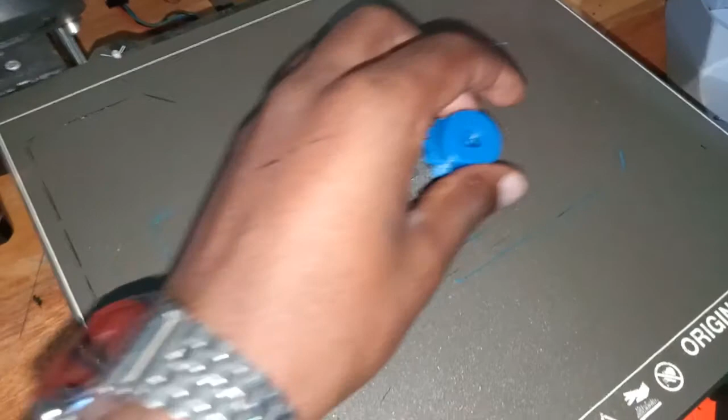In this section of the video, I'm going to show you the steps that I carried out, or the history of the design of this bevel gear. So I used Fusion 360 to design the gear, and the material for this gear is plastic PETG material. This lower section of the screen shows the history of the model gear, the 3D gear.

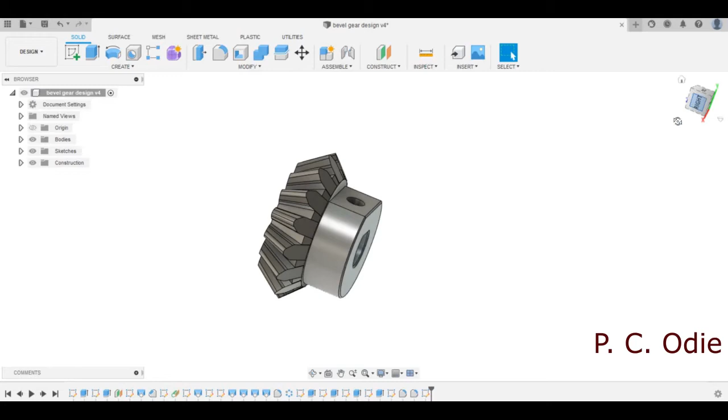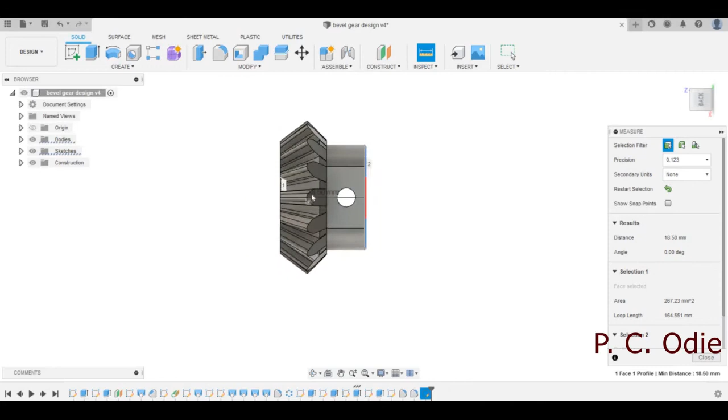So to begin, let's do the inspection. The length of the bore is around 18.5 millimeters. Here, that's 18.5. That's the length of the gear, and then the central hole, or the bore where the driven shaft is mounted, or where the central shaft passes through, has a diameter of around 8.1 millimeters.

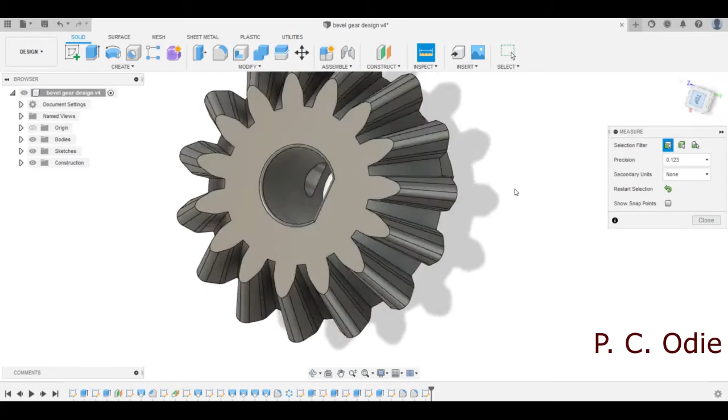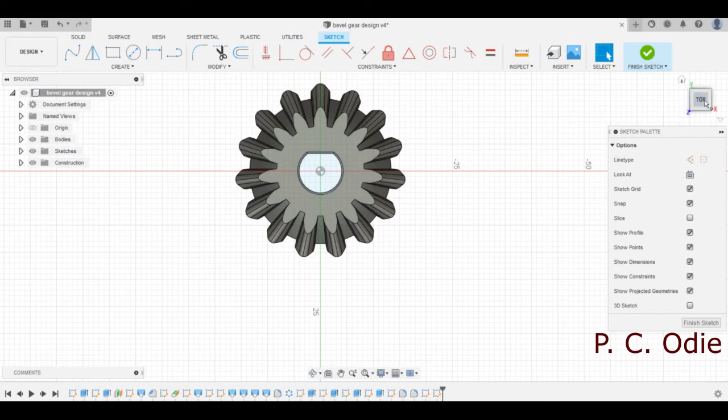And also for the outside diameter, let's see if we can find it. You can estimate. So the outside diameter of this bevel gear is around 32.2 millimeters, and then for the pitch diameter, you can try and estimate it here. So the pitch diameter is around 29 millimeters.

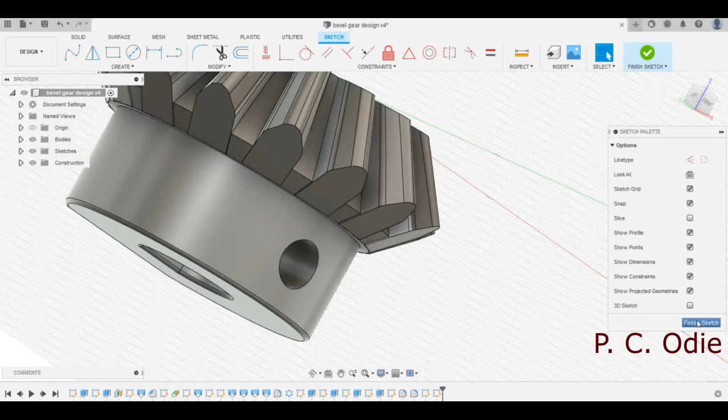That's the pitch diameter for this bevel here, and it also has a keyway. It's not entirely a keyhole, but it does the function of the keyhole. It's used to reinforce the central shaft, or the shaft that goes through the bore. Its diameter is around 4. So an M4 screw is strong enough to reinforce the central shaft, and it goes from end to end.

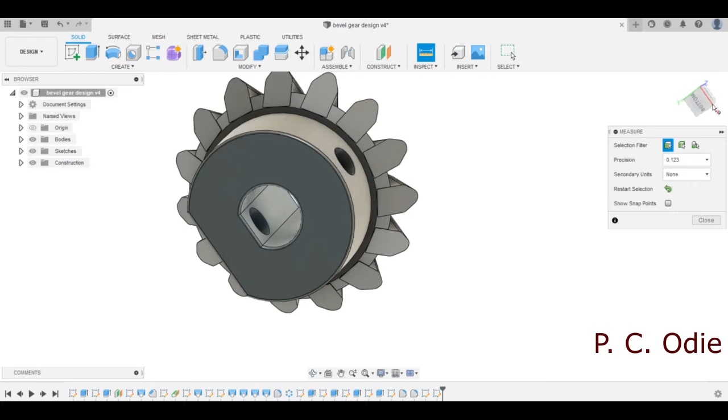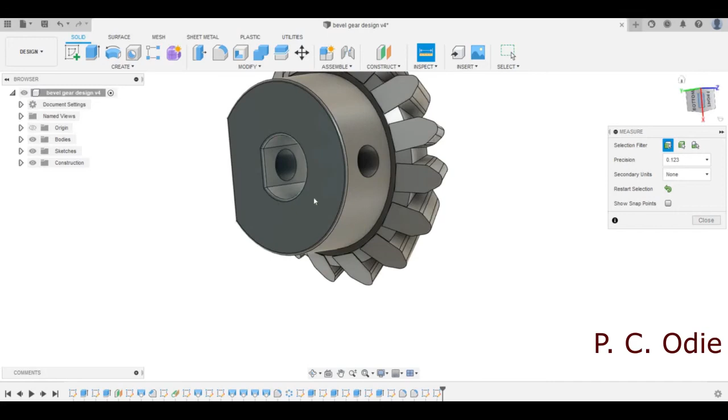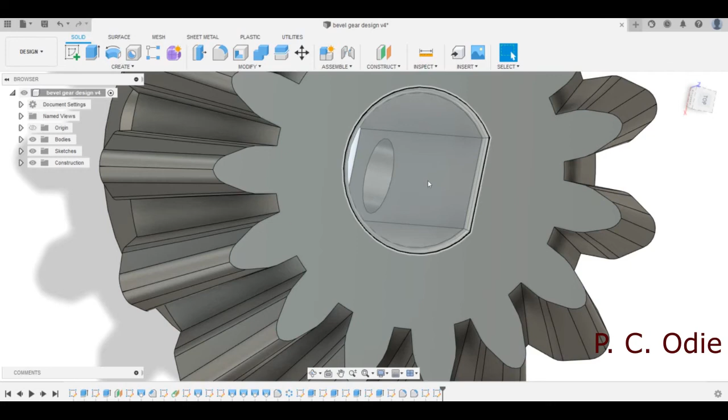So the length of that screw should be a little bit more than, or even equal to, the diameter of this section here. And it also has a flat part here. The hole has a flat part, and that flat part also helps in reinforcing the shaft. It matches with the shaft, so the shaft also has this flat slot that matches this same section of the gear.

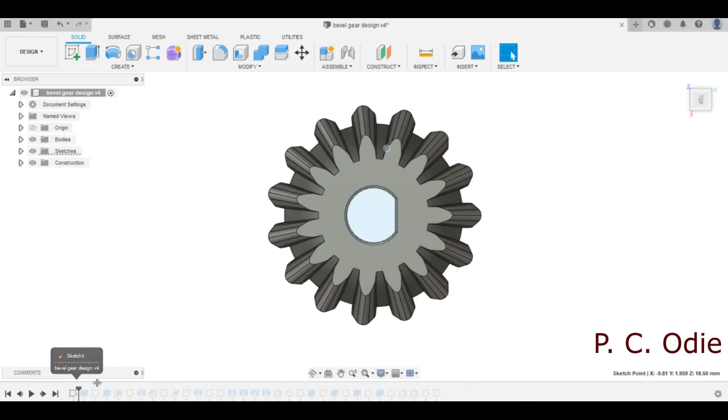And the gear is a 15 teeth gear. You can see 1, 2, 3, 4, 5, 6, 7, 8, 9, 10, all up to 15. So let's go straight to the history, or the steps that I took. I started with this cylindrical section, and then I created another section here. This face is where the actual gears are placed.

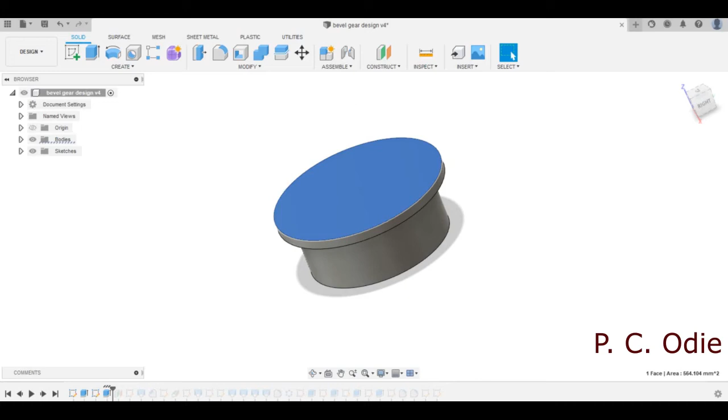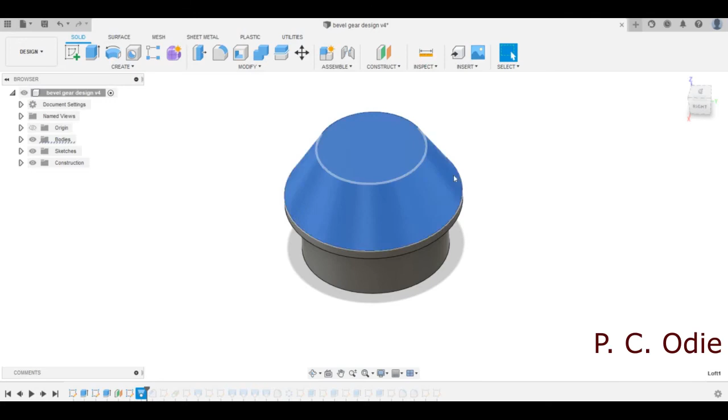After that I created another offset plane, and then I created a sketch of a lesser diameter, this sketch here, and applied the loft feature to create this conical shape. It's on the surface of this conical shape that I then created the teeth of the bevel gears. I did some filleting on this lower part, and I decided to create another plane.

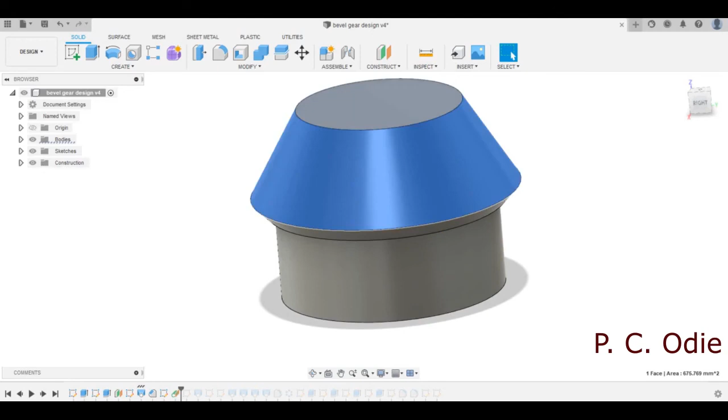This plane is tangential to this conical surface. It allowed me to create this tooth here. So there is this first sketch, and then I created a second sketch. That plane allowed me to create this sketch easily.

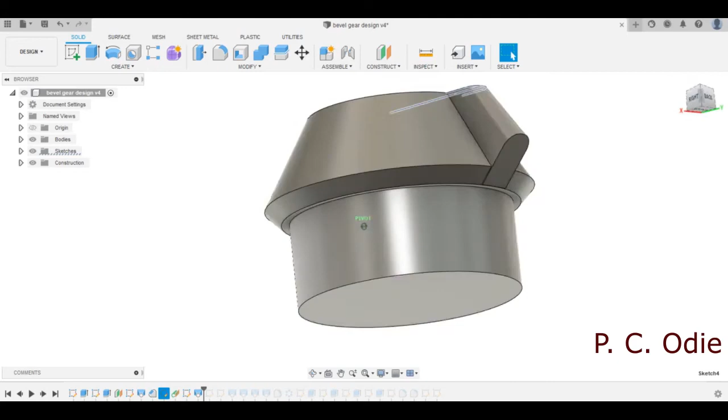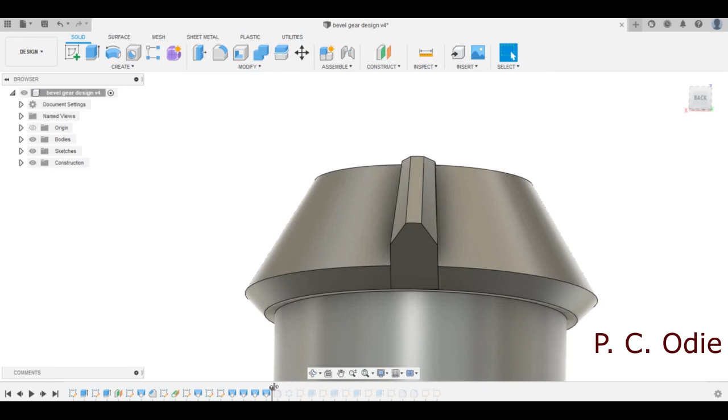But since the teeth of the bevel should not be so cylindrical, I decided to create another profile. As you can see, this profile, and let's see how it looks. Now this is the final profile of the teeth here. This is how it looks. And after that I did some filleting to give it rounded edges.

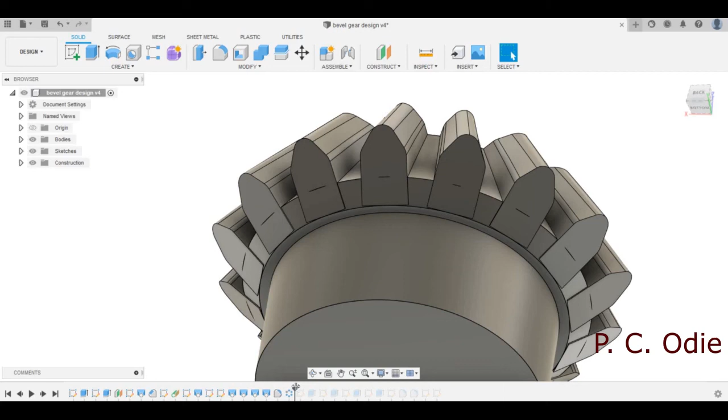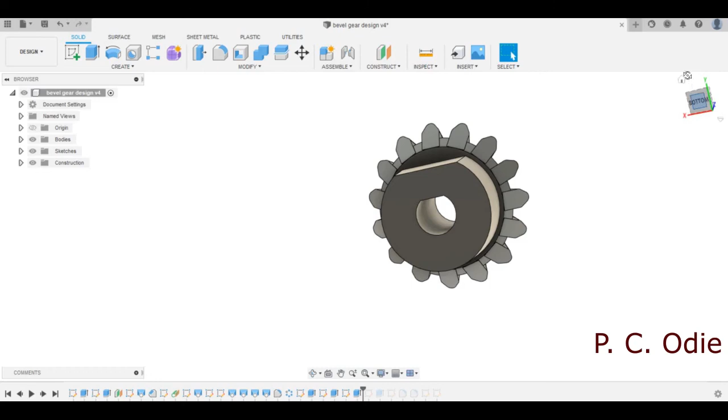Then I patterned this tooth profile. I created a circular pattern all around here. After that I also created this bore, this hole here, using the same function, extrude cut. Then I created this slot and replicated it into the inside bore. I also created the keyway, or the screwway, and did some filleting.

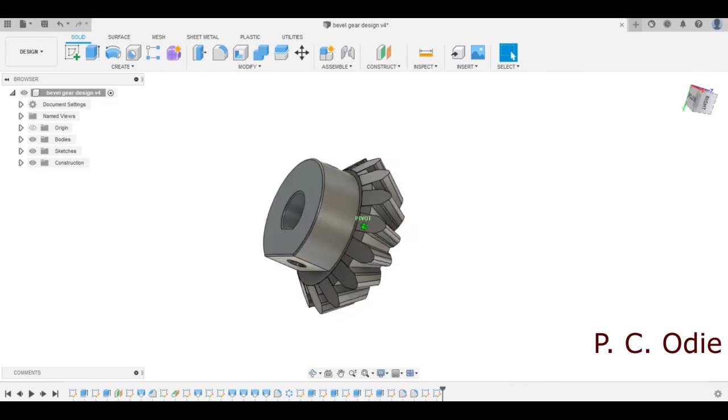And that's the final gear that I came up with. Thank you for staying tuned, and I'll show you the final manufactured gear shortly. It's made of plastic PETG material.